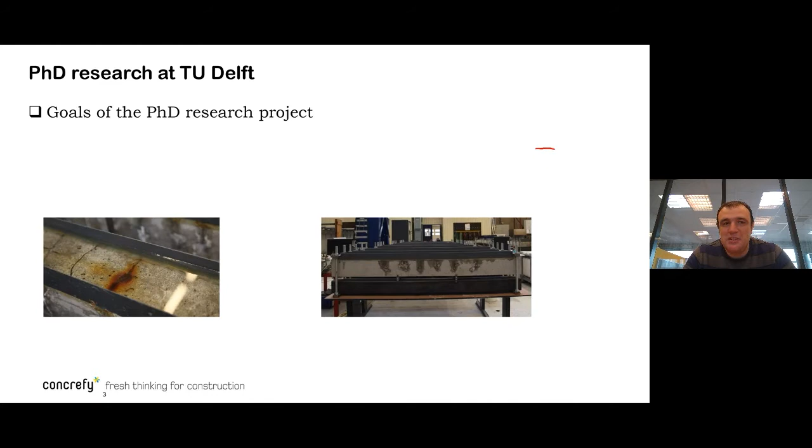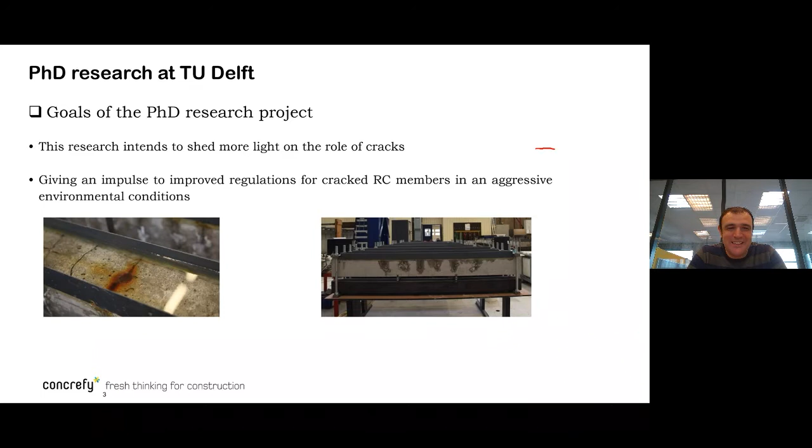The main goal of the PhD was to quantify the influence of cracks on the durability and service life of reinforced concrete structures in relation to chloride-induced corrosion. I saw the schedule, so I believe you already heard a lot in the previous 4 days about fracture mechanics, cracks, transport mechanisms in concrete, so I will not go into many details. I will just briefly show some interesting results.

After 1 year of a lot of literature study and a state-of-the-art report, the experimental setup was developed. You can see maybe in this photo, I don't know, do you see my mouse, Eric? This photo right down at the bottom. At the end, 32 reinforced concrete beams were cast, where I simulated a severe environment by putting containers on top of the beams.

And a 3.5% sodium chloride solution was used to simulate, as I said, an aggressive environment, with wetting-drying cycles: 2 days ponding cycle, 5 days drying cycle. And what were the variables in the experiments? Actually, the crack width, the crack frequency, meaning the number of cracks, also concrete cover and type of loading.

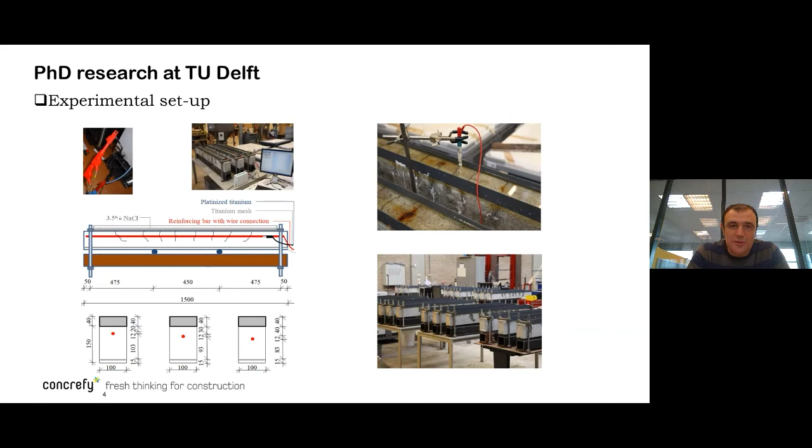The type of loading is interesting in relation to self-healing. When we have a variable load, which is quite common in reality and practice, the influence of self-healing is unfortunately a little less emphasized. But in case of sustained load and very small cracks here and there, I noticed the process of self-healing occurred and was very useful to slow down the corrosion progress.

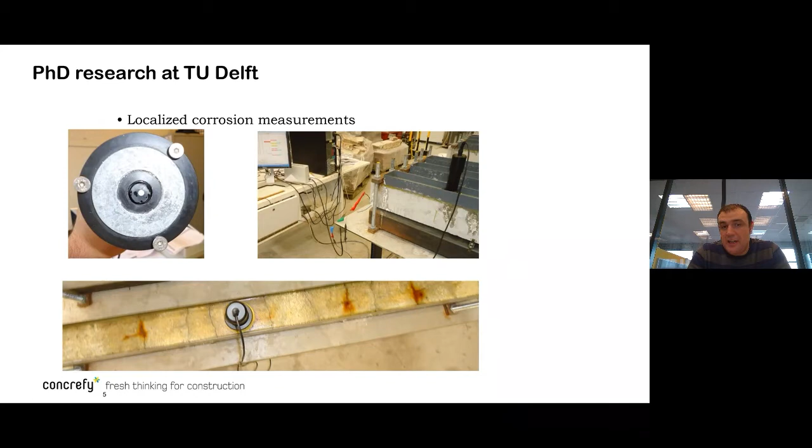What was also very interesting is that I measured localized corrosion, because we can have pitting corrosion or uniform corrosion. By measuring localized corrosion, after 2 years we had plenty of results, and it was really a headache to collect all of them.

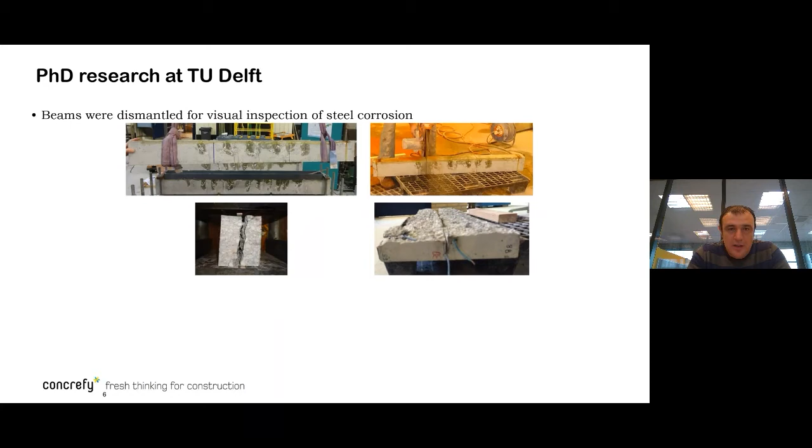And it was decided at the end that all beams, as you can see in the photos, were taken out from the setup. They were cut in thirds, into 3 pieces, each half a meter, and a splitting test was carried out, so we can see every beam from inside what happened there.

And here we can see one very interesting conclusion. At the moment, the thought in society is that there is no unique approach when discussing the influence of cracks on durability. As you know, there are codes and limits which just limit the maximum allowable surface crack width, and there's a belief among some engineers that as long as the surface crack width is less than, say, 0.2 or 0.3 millimeters, then corrosion locally is negligible and doesn't matter much. But as long as cracks are larger, there might be problems.

But what we saw in this research, and what was very interesting to show, for example here on the first photo, is the concrete cover of 20 millimeters. This was actually very porous, low-quality concrete, which was picked on purpose, because research cannot take place over a very long time - within 2 years I had to complete the tests.

So after 2 years of testing, we can see that for the unloaded beam, chloride penetration reached the level of the steel reinforcement, and we have slight corrosion. This was treated as uncracked concrete.

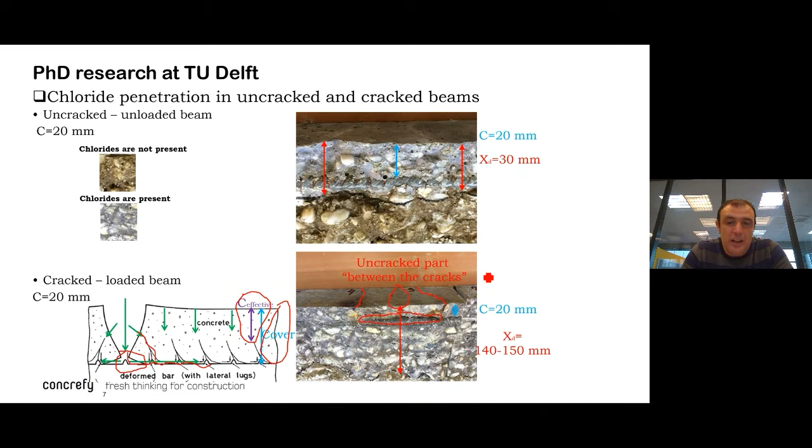So the main conclusion was that what really matters is the steel stress, which determines the development of corrosion, rather than the surface crack width as it is currently in the codes.

How to connect all the pieces at the end - as I said, we measured locally the development of corrosion, and what was very interesting is that in every reinforced concrete beam, the point of maximum corrosion rate was also the point of maximum steel stress in the beam, which confirmed our assumption at the beginning.

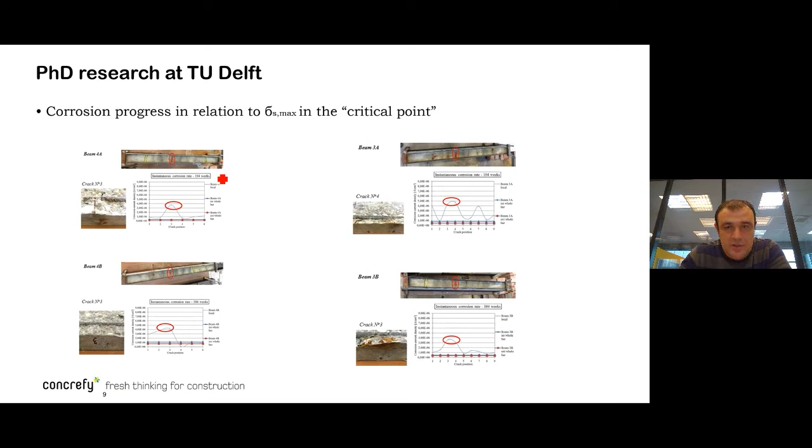It can be concluded that, as I already shown, corrosion progress is related very closely to maximum steel stress. If we have small cracks and a lower value of maximum steel stress in concrete, this damage can be acceptable. For example, here we can see an explanatory model.

First of all, we have to distinguish two kinds of corrosion. Corrosion can be uniform, but on the other hand can be localized as well. So in case of cracks, we are talking about localized corrosion. Higher steel stress, which is higher than 250 megapascal, can already shorten significantly the service life of the reinforced concrete element.

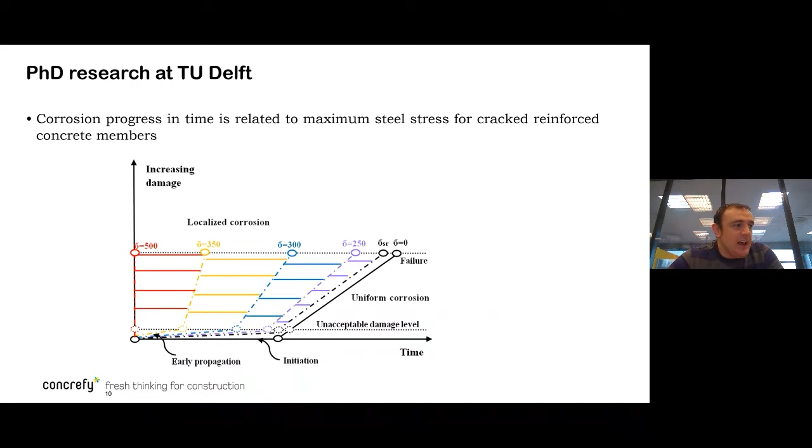On the other hand, if you have steel stress below 250, more or less we have a similar behavior as concrete that is uncracked. But of course, this is all based on a certain concrete strength, and the final conclusions of the thesis were that if we have a correct combination of maximum steel stress, appropriate concrete cover, and appropriate concrete strength under certain environmental conditions, this is the way we can design longer life concrete structures.

Also, one very important fact discovered during the research was that maximum load determines the damage in concrete in relation to corrosion. So it means once you have damage on the bridge - imagine you have a small bridge, and a big truck goes over the bridge and this truck makes some damage - after that, this damage already made there would be difficult to recover from chloride ingress, maybe with some self-healing innovative techniques in the future.

But in this work, it was proven that when we have a variable load, actually the maximum load is the governing one.

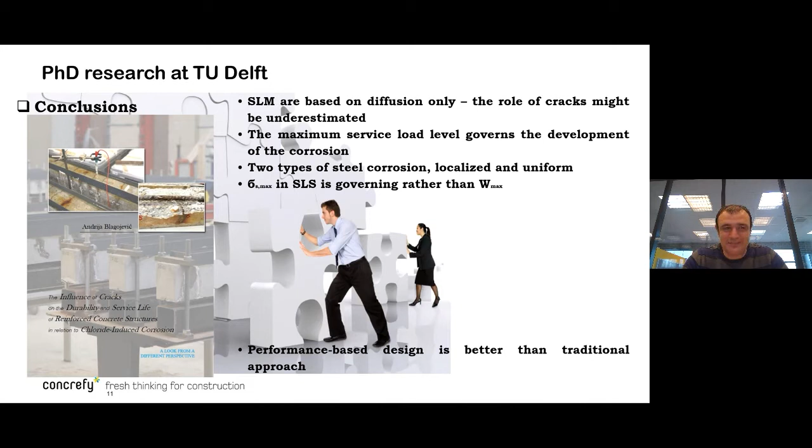If you want to see more details about all this work, you can download the book from the internet. Yeah, this is the first page.

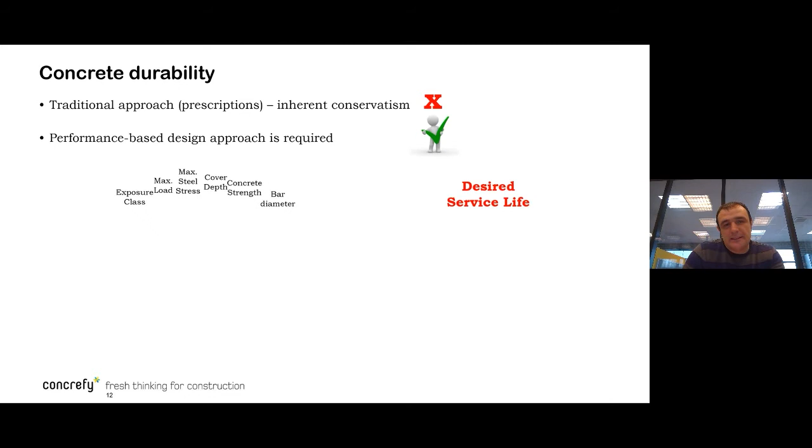So the PhD research was completed, and more or less this is what I just explained. I realized that we have to have an optimum approach for the desired service life. But somehow I realized, okay, all this stuff we did in the laboratory is valid under laboratory conditions - what would be the case in real concrete?

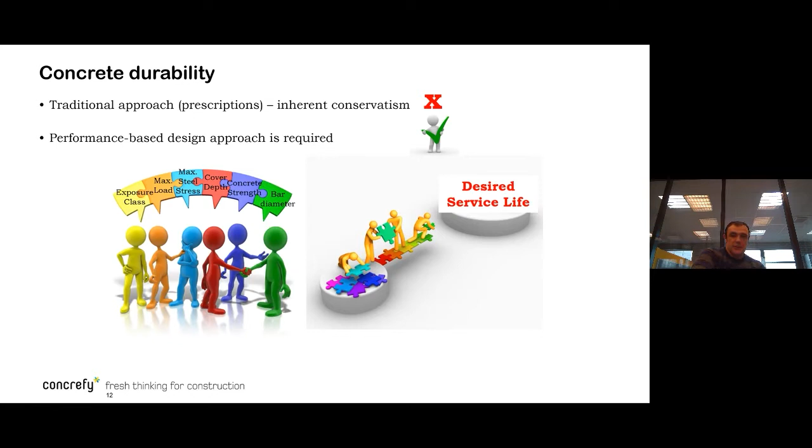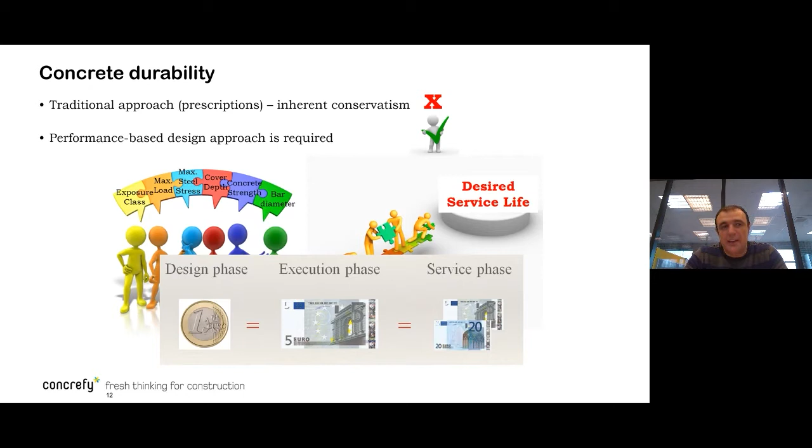And as the title of my presentation says today, from labcrete to realcrete, I started to think more about how we can in the future develop a system of concrete durability monitoring, which can be at the same time scientifically approved, but on the other hand also commercially applied and user-friendly and very understandable for engineers on the site.

On this slide we can see during the Defense Day my current boss, who just gave a presentation today - how we were discussing, and this is kind of the topics we discussed then for the future: concrete durability, material health monitoring, structural health monitoring, energy efficiency. We share the same vision.

And what was very interesting actually, how I came to Concrefy - at the same time, Tuan van Kasteren was searching for new people to build the R&D department and to focus on monitoring of service life. On the other hand, I was very teased and triggered by how I could shorten the gap between the fundamental research in terms of concrete durability and find some kind of pragmatic solutions which can facilitate the decisions of asset owners.

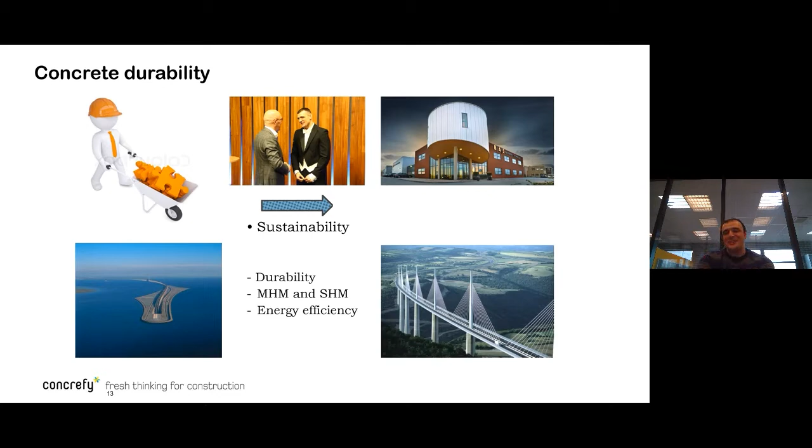So I accepted this challenge. A few days after the defense, I moved to Venlo, and I already started on Monday. And then we created one big project, asset management. But before I come to that topic...

I would like to share this slide with you. So Tuan in the morning explained how smart formwork works with a sensing system. So Doka is actually our mother company. Four years ago, in July 2016, they took over what was at that time BAS Research and Technology.

So Concrefy is now, since two years ago before the name was BAS Research and Technology - Doka took over BAS, and they had a formwork they built, and out of the blue with the Concremote, they had a smart formwork, which in other words means they can increase the productivity on the construction site. You saw the benefits this morning of what customers can gain and what kind of added value our clients can reach.

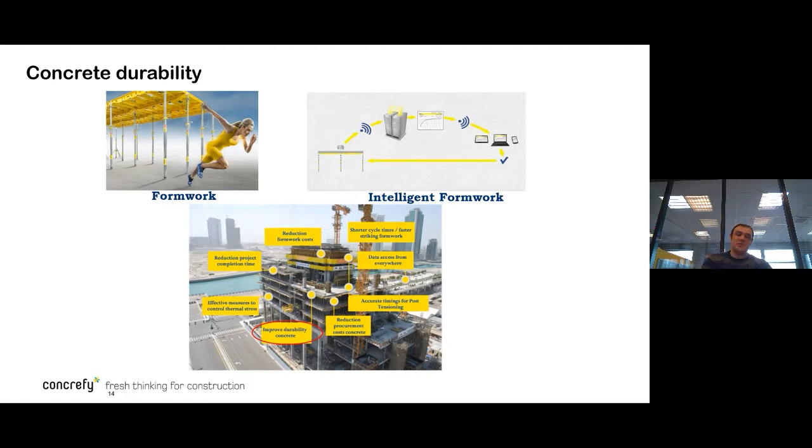But at the same time, I was thinking about concrete durability. Why should we only be involved in the construction phase of the project? Why don't we stay during the whole operational phase of the structure? This way, we can help not only the contractor during construction, but also the people responsible for maintenance, functionality and operation during the whole service time, which is sometimes 50 years, and in the future we will even design structures with a design service lifetime of 100 years.

More or less this was the kind of portfolio we established as a company: we want to create decision support tools during the design phase, construction phase, and operational phase. And the vision was from cradle to cradle.

So in the design phase, we use finite element modeling and simulations of young hardening concrete. This is how we can discover, for example, potential risks in the project.

During the construction phase, you also saw Concremote as a powerful product, but we are also busy with process control and production control in the prefab, on the site as well, checking the quality of fresh concrete digitally. We are also developing a kind of sensor for that purpose.

And asset management, yeah, asset management was a big picture. So this was the vision, but under the umbrella of asset management, what we want to do actually is provide a real-time concrete durability monitoring system which can facilitate the decision-making process of managers and experts.

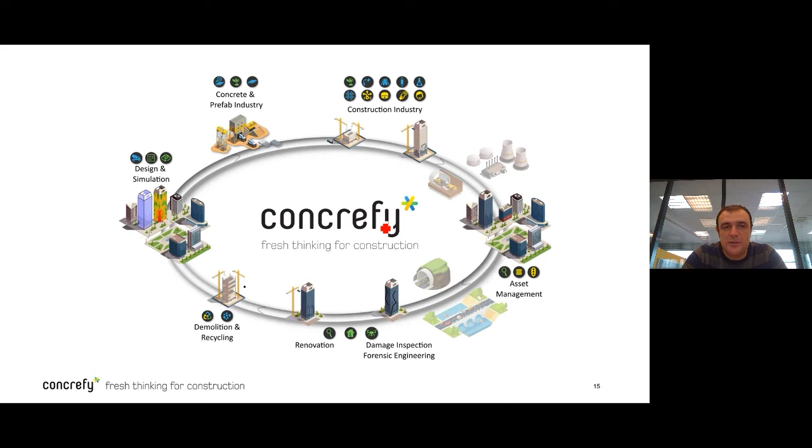So this should be a very user-friendly system with different levels of understanding. It should, on one hand, be very user-friendly in terms of traffic light, red, orange, green, but on the other hand, has to be scientifically proven and validated, so that all knowledge, guidelines, codes and standards are somehow embedded in the background within interpretation technology and smart algorithms.

You are still here, everybody? Yes. Can you hear me? Yeah, okay. Do you have some questions, remarks, or any feedback till now?

Yes, I have a question. I'd like to know more about your experiments, your thesis. Did you do some electrochemical measurements on your specimens? Not only potential, the corrosion potential, but for example electrochemical impedance?

Yes. So as far as non-destructive techniques are concerned, what was applied was half cell potential with two different kinds of electrodes: one embedded in concrete, and the other external. I also applied linear polarization resistance measurements, so I measured the corrosion rate, the average corrosion rate of the steel rebar, as well as localized corrosion rate with another electrode and some commercial device. I also did some resistivity measurements. So at the end, I have a bunch of results. If you download the thesis, you can see more details about that.

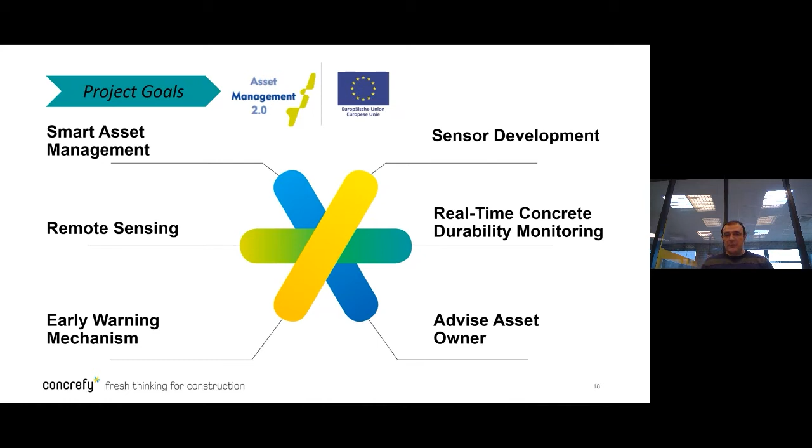Project partners have been selected based on the requirements we needed. So we needed a partner who is a specialist for wireless technology and power management, and this was a big company from Germany, Umlaut.

They also changed their name actually. Since 2 years ago, they are Umlaut—before, the name was P3 Communications. They have offices worldwide, and they are very busy in the high-tech industry, in the automotive industry. As the name says itself, P3 Communications—before, they were busy with communications and all this data management.

We had on the board IBAC University and the group of Professor Raupach. Maybe some of you know Professor Raupach.

He's a professor of the group of corrosion of materials. On the other hand, we had also representatives of authorities, let's say, the city of Mönchengladbach and Gemeente Venlo, which means in English municipality, Mönchengladbach and Venlo.

Their role in the project actually was to come up with what kind of maintenance strategy they have at the moment and how they are dealing with the concrete infrastructure. What's the plan for the future? And what kind of issues and problems they have nowadays.

We had a certain time framework, 3.5 years, and a goal that had to be achieved. What was also very interesting: at the beginning, the first 6 months, we spent on a lot of inventarization. One very important task was to analyze what endangers concrete durability.

How can we quantify in a more pragmatic way what can negatively affect the concrete durability? As you know, we can have different weathering conditions. We have environmental classes, you can find that in the codes, 206, where we distinguish the different classes. We can have, for example, concrete areas exposed to carbonation, to de-icing salts, a marine environment, but on the other hand we also have some concrete which is not exposed to these aggressive substances, and then it's more durable.

Actually, we made a kind of pyramidic approach, so we started from the top. Let's see what really affects concrete durability and how we can quantify that.

In short, we have 3 important fields. Concrete quality: when I say concrete quality, I mean if we have a dense concrete cover with good quality, there's a higher chance of better durability. If the cover depth is higher, the distance for aggressive substances to penetrate through the concrete is also longer, and it will take more time, so again it's more durable.

But we also have a lot of structural details which can affect these transport processes, like as I mentioned at the beginning of the presentation, steel stress. We can have different kinds of cracks. And at the end, we have to make an appropriate balance between all these parameters and come up with the most optimized solution. But as you know, one thing is when we do calculation and design for something, and another thing sometimes happens in reality. I mean, the spatial variability and the influence of many local effects can be very significant, and this is why we sometimes see a big scatter in reality from the things we do in a lab and what the structure is designed for.

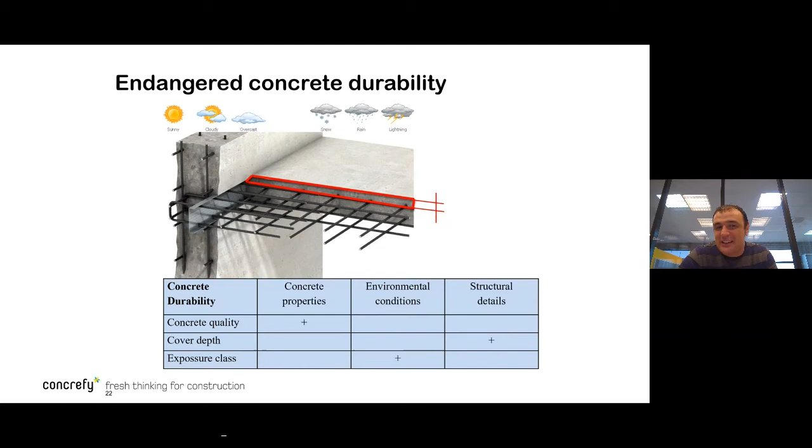So in total, here I will mention just some parameters. The list can be much longer than this. I said temperature. Why temperature? We saw today how, when we have fresh concrete, early age concrete, compressive strength gain happens. For example, if the temperature is too high during the hydration phase, as some of you already know, we can have a problem later on with delayed ettringite formation.

Moisture, very important parameter. Moisture, I always say, is kind of a friend of concrete during hydration. As you know, concrete hydrates - probably you had the lectures. We need moisture, and if we have premature evaporation of moisture, it will negatively affect the development of many properties of concrete, strength first of all, then later on also durability. But later on, when we have hardened concrete, in a way moisture is an enemy.

Why? Because if it penetrates from outside together with chlorides, or for example CO2 or any other mechanism, moisture is a parameter involved in most of them, and degradation of concrete will occur. Here we mention load because of cracks, chloride ions, gases, abrasion, aggressive liquids. We can also have sulfate attack. If we have alkali, we can have alkali-silica reaction. Some air voids in the cover can negatively affect durability. There can be some dust during the execution phase of the project, fire.

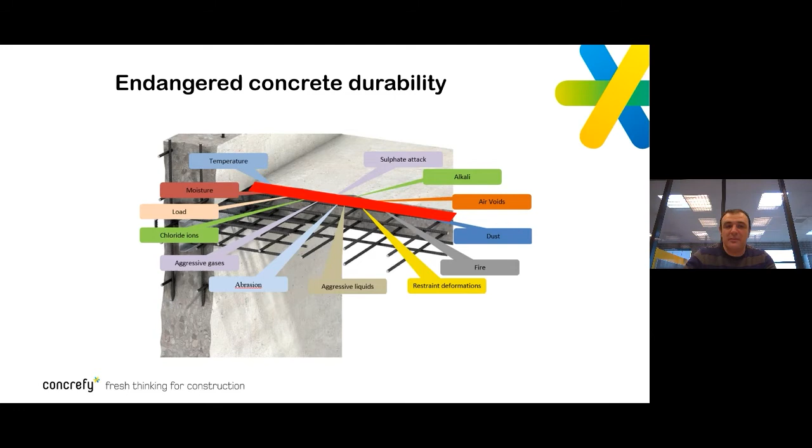So as I said, the list can be very, very long. So how to quantify this? How to develop a sensor which will measure all this kind of stuff is, pragmatically speaking, mission impossible. There are thousands of books written about all these topics.

So at the end, we decided what is the main parameter that affects durability - as one of your first answers suggested - we call it concrete cover penetrability, as a key performance indicator which will govern the durability of a concrete element. So the idea was: if we are able to measure concrete cover penetrability, but wait a second, how are we going to measure concrete cover penetrability in real structures? Which parameters do we need to measure? How? Do we need all different kinds of commercial sensors that are on the market nowadays?

There are some sensors which measure chloride, okay, but it's not a perfect sensor. It can survive a few years in concrete, and it needs to be recalibrated again and again. And there is a sensor for pH measurements, and different kinds of non-destructive measurements. And all these results are just numbers. If there is no good interpretation, it's a challenge again and can lead to misinterpretation.

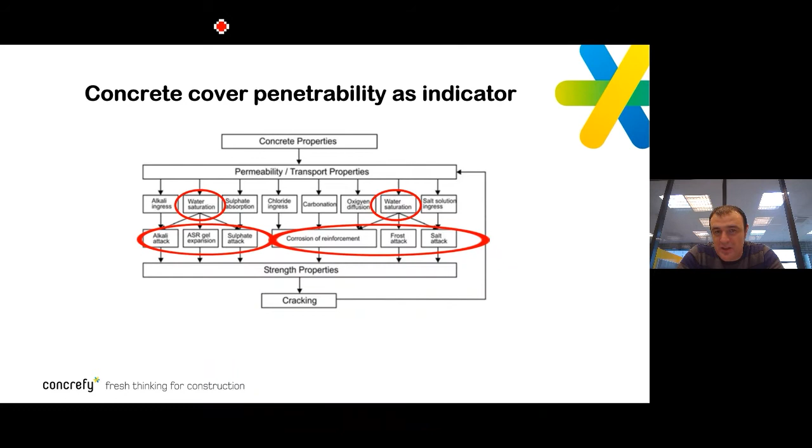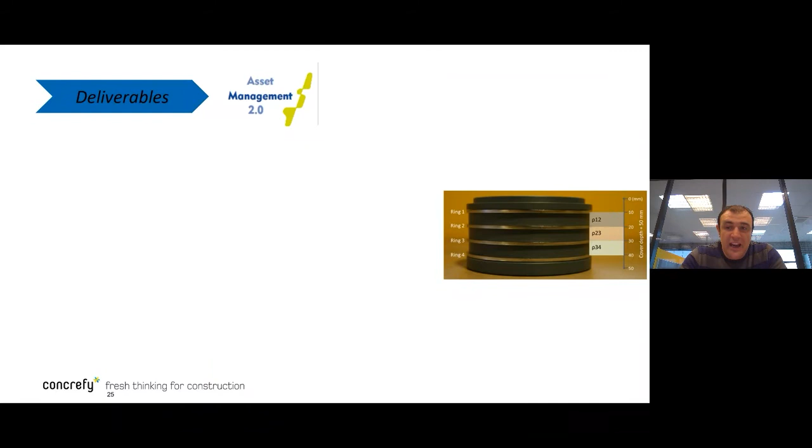Actually, what we measure first is electrical resistance. By measuring electrical resistance and doing a calibration test in the laboratory, creating isotherms, we are able to relate electrical resistance and moisture content. By doing that, we are able to measure at any point in time, every centimeter.

As you can see here, the sensor is 50 millimeters - that's the depth of the sensor - so we can create the profile. We have 3 different levels of measurements.

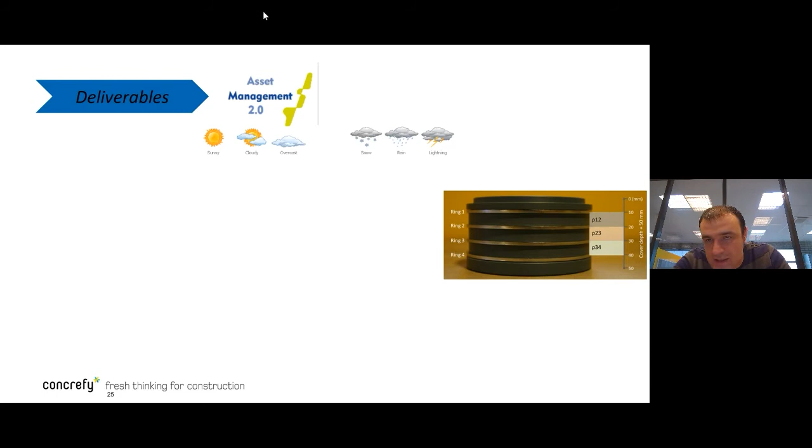Measurements are done between the rings, and this sensor - this is the concrete which I showed you in the previous slide, this is the concrete cover. So if the sensor is embedded in the concrete cover, it looks like this.

Imagine this transport diffusion process of moisture sometimes takes a lot of years. We are able to measure what really happens in a real structure. So it's not an assumption anymore.

It's not something based only on measurements in the lab, but we have a sensor in a real structure which gives us real-time information, which is very valuable for further prediction and predictive analytics. Let's say we can know if we are in a green zone now, that everything is okay.

Or the problem is going to come within a few years, or imagine something unpredictable happens for any reason. The sensor will be able to capture this moment, like today, and send a signal via web portal and internet to the client.

It will send a notification: this structure, at this element, red zone - something is happening now. So you have to react upon that, and this is a proactive approach.

As you know, most people who inspect concrete infrastructure see, let's say, the outside part of the concrete, the skin of the concrete. So most of the time we have to wait for the problem that happened inside of the concrete. As you know, for example, corrosion will start inside of the concrete and it will not be visible for many years.

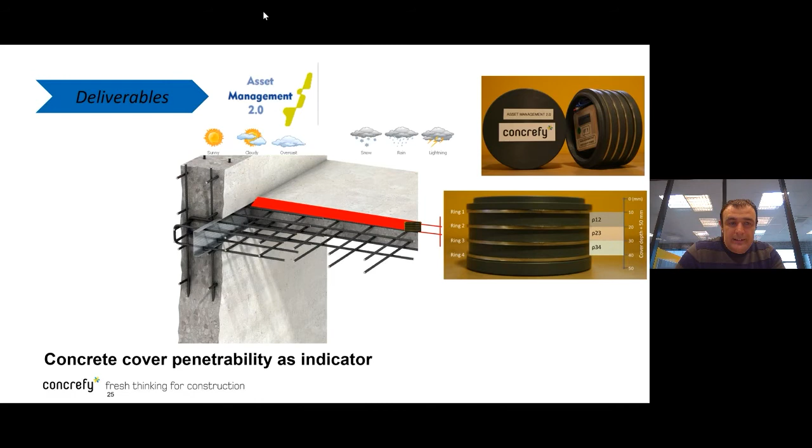Before I start to explain how we started tests and what we did in the lab, and how we correlate lab criteria to real criteria, is there any question? Is everything clear so far?

Salam asked, were your specimens under sustained loads? If so, could you please explain how did you manage to keep constant loading, taking into account the creep and relaxation loss of the load?

So probably this question is really in relation to the PhD research. It was asked half an hour ago, so maybe related to the last part of the presentation.

Okay, yeah, that's one, I will answer. If you see the book again, actually it was not a sustained load, but a load was applied to create a certain crack width at the surface, and once it was achieved, it was not changed anymore. So there was an effect of relaxation and creep, and in time the load became actually a little bit lower. You can find this calculation and analysis in the thesis, and this is why some cracks became a little bit lower in time. Is the answer clear?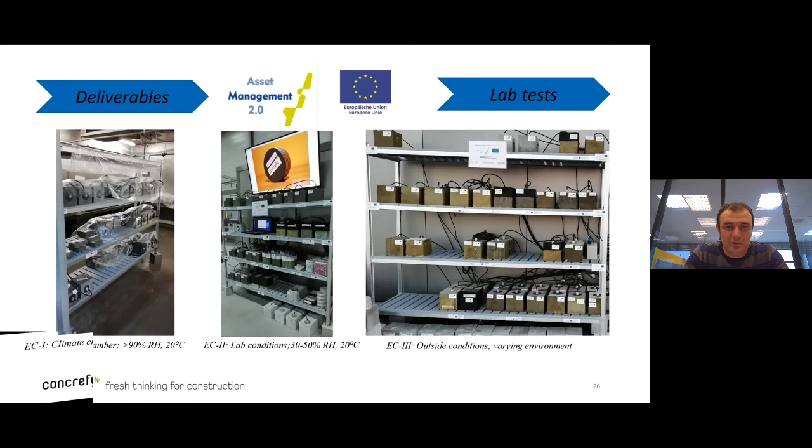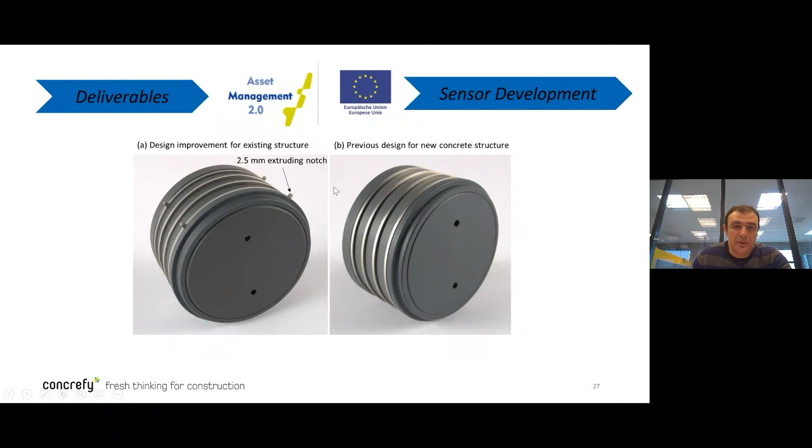Some big walls - at the end of the project we developed these two sensors, let's say. One is for the new concrete, and this solution is valid for both structures, for the new structures as well as existing structures. We will see later on how the procedure of installation works in existing structures. For the existing structure we have a small notch here and there, which is 2.5 millimeter, and this is the sensor for the new structure.

This is the cross section of the sensor, so you can see how it looks like. And why the sensor is so big is, of course, that we need a lot of electronics inside, which will make it possible that the sensor is wireless.

There was actually a big challenge. The idea was that once we embed a sensor in the concrete, it has to survive at least 50 years without human intervention at all. Because our vision for the future is that once we install these sensors, we can control the whole infrastructure worldwide - not that every now and then somebody goes and changes some batteries, again and again.

So the wireless system and power management were developed in a way that the battery in the sensor can survive for many, many years. Don't ask me how it was possible, but at the end it was possible. It was the biggest challenge at the beginning.

And we actually use LoRa technology system. It means if we have one big project with sensors, let's say 20, 30, 40 sensors, there is one big gateway which collects the whole data from the sensors, sends them to the cloud, and then we download the data directly from the cloud, and all this data goes via smart algorithms and interpretation methodology.

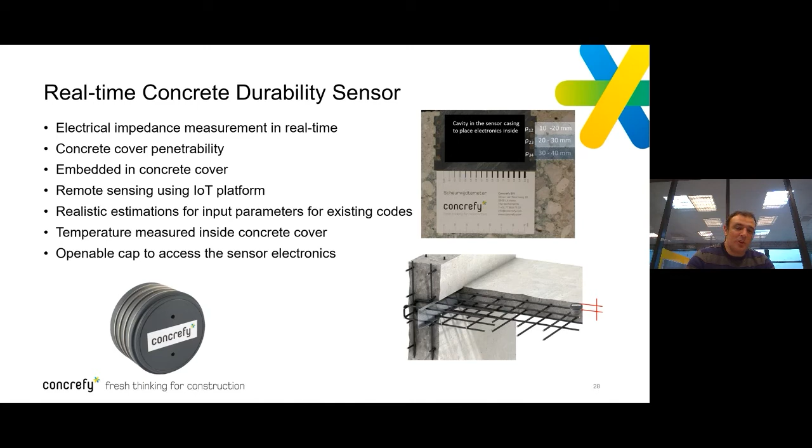By measuring these two parameters, we saw at the end how we came up with very important and emphasized added value for the customers. We saw examples of how a customer can save a huge amount of budget in projects by shortening the cycle times and the completion time of the project, by knowing which kind of mixture is needed under which circumstances. And as Tuan said, the vision for the future is that we develop the system so we can have control of the concrete infrastructure's whole service life, until the phase when we need to demolish the structure and reuse the concrete again.

What I just said, we can actually see in this slide. For example, this is the Zeelandbrug in the Netherlands, one of the biggest bridges. You can read on the internet, they have many issues, challenges, and problems nowadays. So you can imagine you have to close the bridge, stop the traffic, inspect it, you need a lot of equipment and a lot of people. In other words, it's time consuming and takes manpower and inspections.

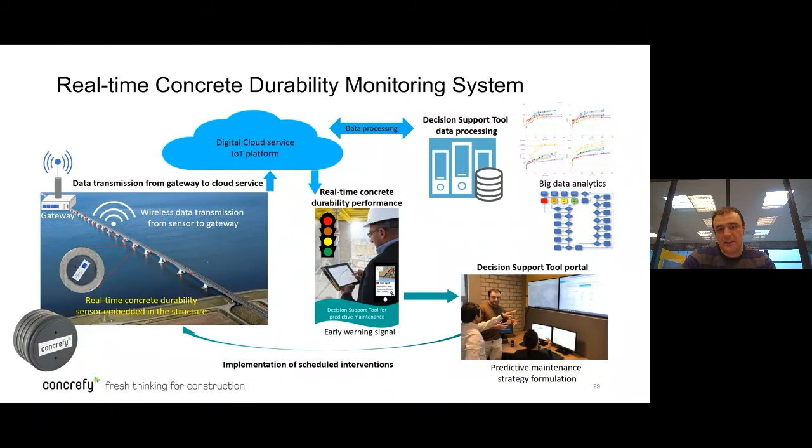Our vision, especially for these large-scale projects, is to have a real-time concrete durability monitoring system, where sensors can inform us and send a notification: hey, there is a problem in this bridge at this column. So we know exactly the moment when we need to react. Then, if the customer is from Australia, he can call a local consultancy agency to do an extra check at that position in the structure, even though there is no significant damage visible at the surface of the concrete. The damage is just about to start around the reinforcement, let's say - chlorides are just about to reach the critical chloride content at the level of the reinforcement.

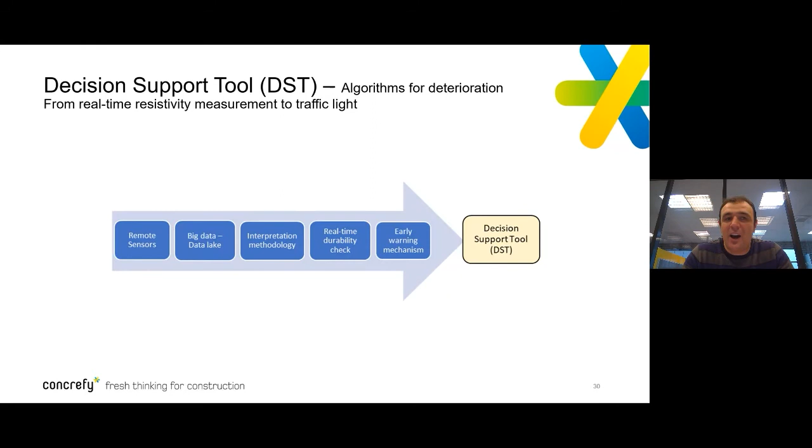So one of the strategic goals of the company is visualization. Everything we do, we try to visualize for the clients. If I show you a lot of text, in a few days from now you'll forget 90% of what I presented. But this event is recorded, so you can always come back to it. In general, if we present things in a visualized way, it's always more user-friendly, and it's easier for communication with people in the concrete field. It's much more clear, let's say. Managers sometimes aren't so interested in the details of carbonation, chloride-induced corrosion, or other degradation mechanisms. They just want to know what they need to do, when, and how much they need to invest for that.

So what we do, the sensor measures the data, we measure the resistance, and by having a calibration test, we know what's the moisture content, we know the profile, and we know the progress of moisture ingress within the concrete cover. By knowing this and applying different guidelines and codes, we're able to create an assessment of all these different degradation mechanisms.

What we developed is a chloride ingress model. We use existing models in a way, but with the sensor we provide more realistic input for these models, because they contain too much empirical parameters which affect the final result. If you have a sensor and real-time data from a real project, your results will be more accurate because the inputs are more reliable. It's that simple.

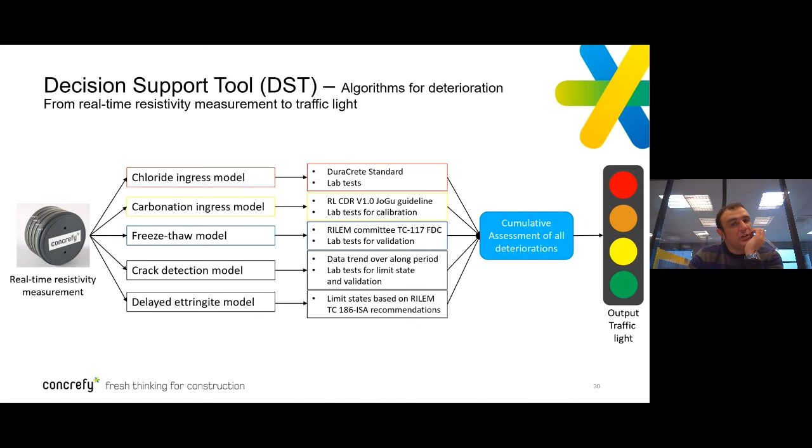So here we can see we have a module for delayed ettringite formation for cracks. If there's any crack around, the sensor will recognize it also. Freeze-thaw model and carbonation as well.

And before we even reach stage one, we know it's going to come in a few years, a few weeks, or 20 years from now. This is important for managers to create budget optimization and predictive maintenance strategies. They want to know when they need to invest money and when they can save money - is it better to do small preventive interventions per year, or one big intervention in five years? It always depends on the budget of the clients and their goals.

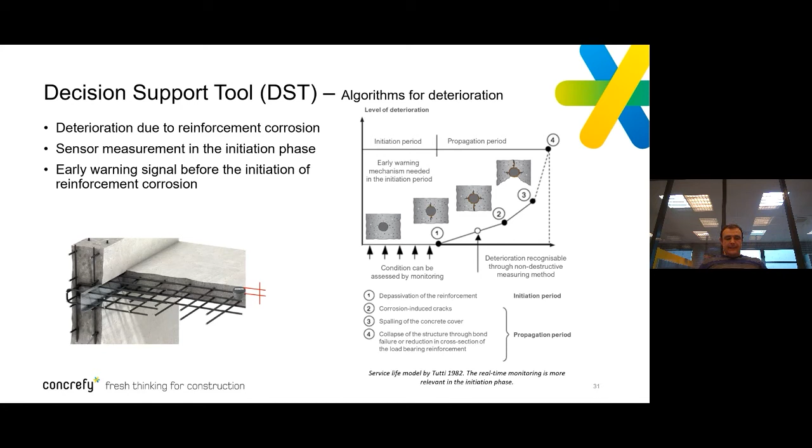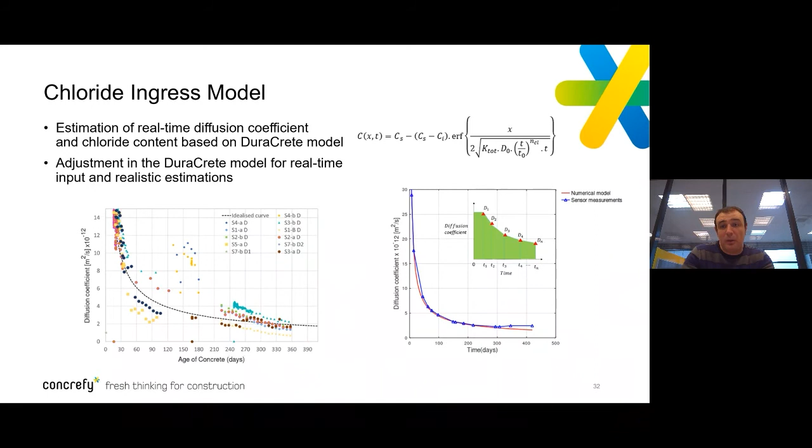Probability of corrosion - in the portal we're able to assess what the probability of corrosion is, whether it's 5%, 10%, or 50%. The limit state adopted here is by Professor Angst at a Swiss university. He created in one publication, which you can read about, a log-normal distribution where critical chloride content is modeled as a stochastic variable.

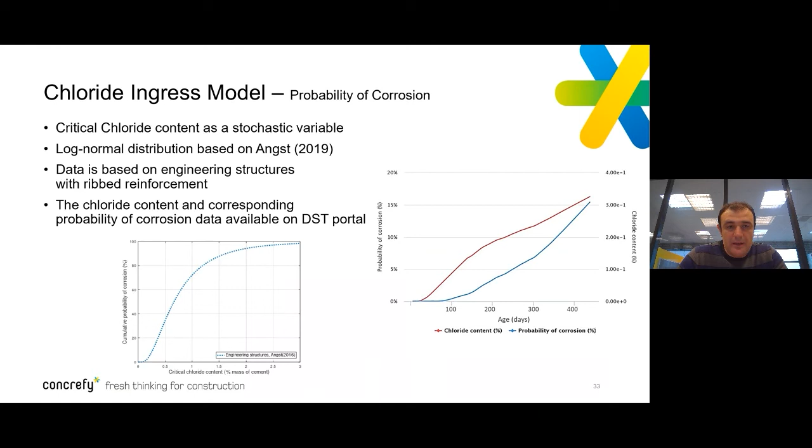So how do we come up with a very simplified solution for the customer, for example, someone who doesn't have any knowledge about concrete durability or concrete at all? They would like to have a kind of traffic light system, so we're here to provide this traffic light system and user-friendly solutions for them.

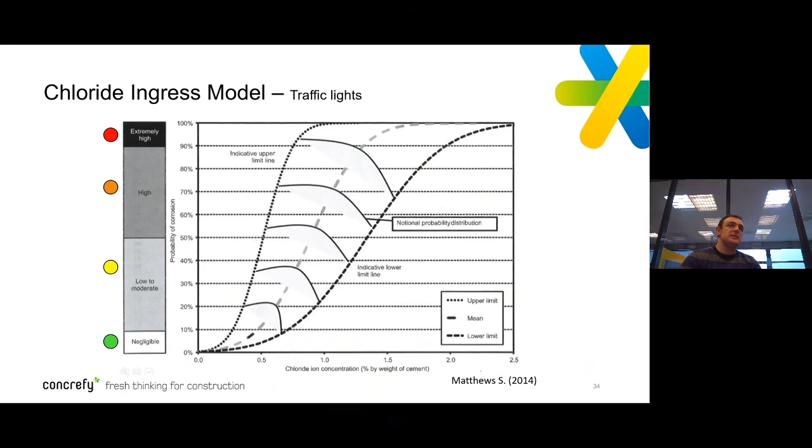One more example of a carbonation model. Based on the calibration and accelerated carbonation tests in the laboratory for a specific mix design, and the measurements in real time, what does real time mean? We measure relative humidity. If relative humidity is between certain levels, we can expect carbonation progress. But if relative humidity is too low or too high, there is not much progress of CO2 in the concrete cover.

This was just one example which will mean that in less than 5 years, carbonation induced corrosion will start, and you can react upon that. You can apply preventive measures. This is very important for asset owners because they can save a lot of money. It's better to invest a small budget into small interventions before severe damage and problems come in a few years. Then it will cost much more.

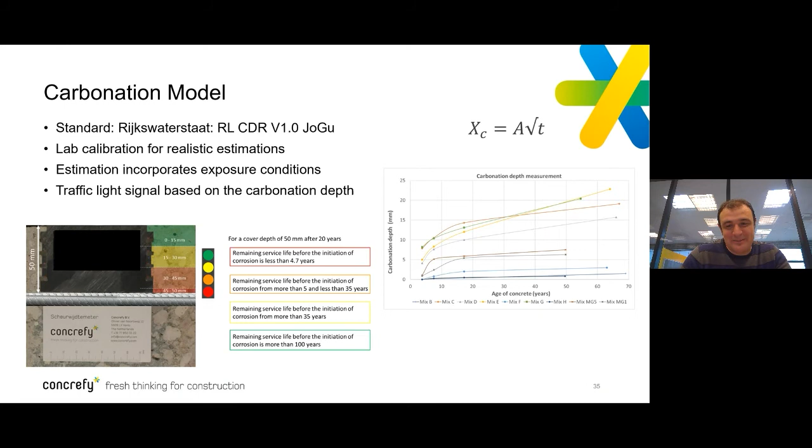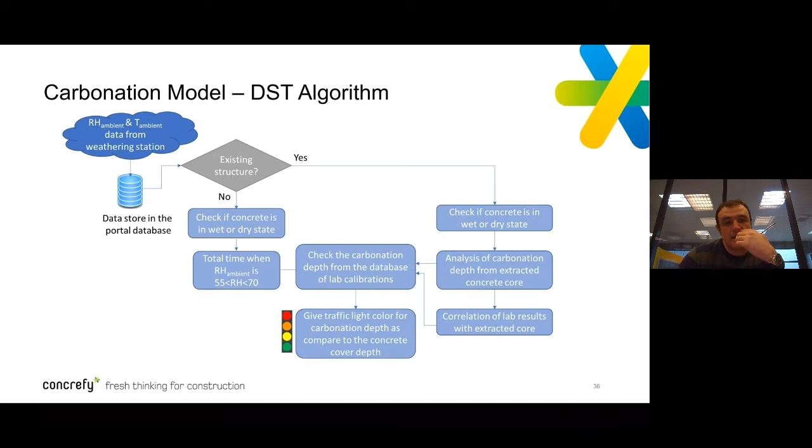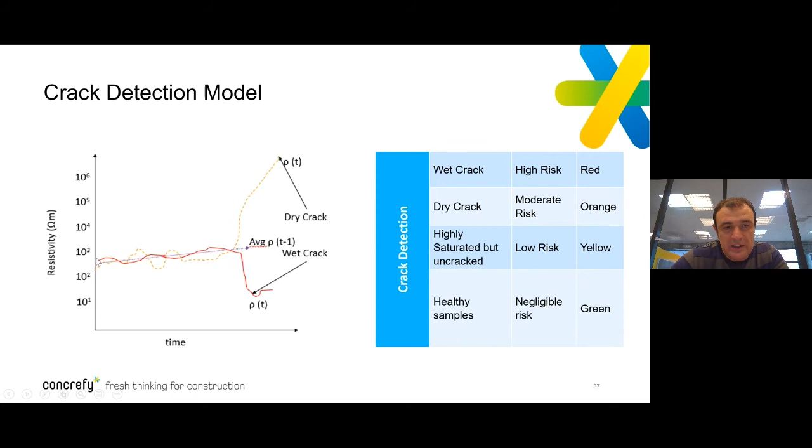So this was the healthy sample, and then when the crack appeared, what happened? The resistivity out of the blue jumped very high - it means it's a dry crack. But once moisture reaches the same crack, the value will go completely down when it's wet. So this was the healthy sample, this was the dry crack, this was the wet crack.

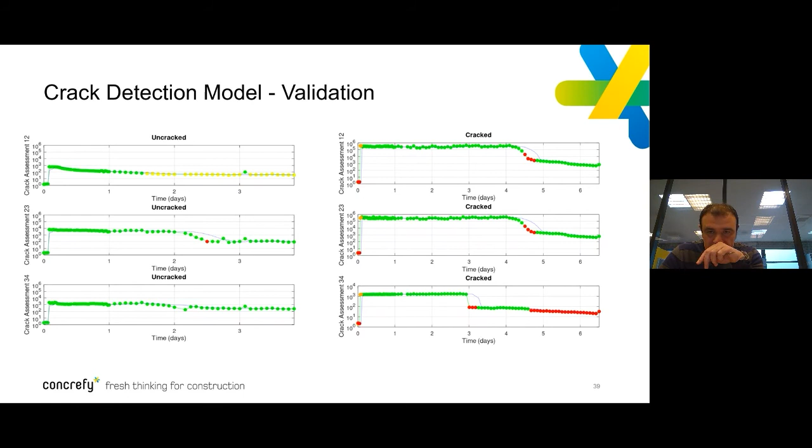Some example of a freeze-thaw model. As you know, the temperature has to be lower than 0 - that's one condition - and the other condition for freeze-thaw attack is degree of saturation. If degree of saturation is above a certain limit, there is a threat in relation to damage, and if it's lower, then it's not a big threat.

Then, of course, there is the influence of many parameters, for example type of binder. Here on the graph, we can see what happened - we did some tests in the lab also with CEM1 and with CEM3B, and all other parameters are actually the same in these two mixes. We see that the resistivity when this transition happened, when water became ice, resistance is higher in the case of blast furnace cement like CEM3B than in the case of CEM1.

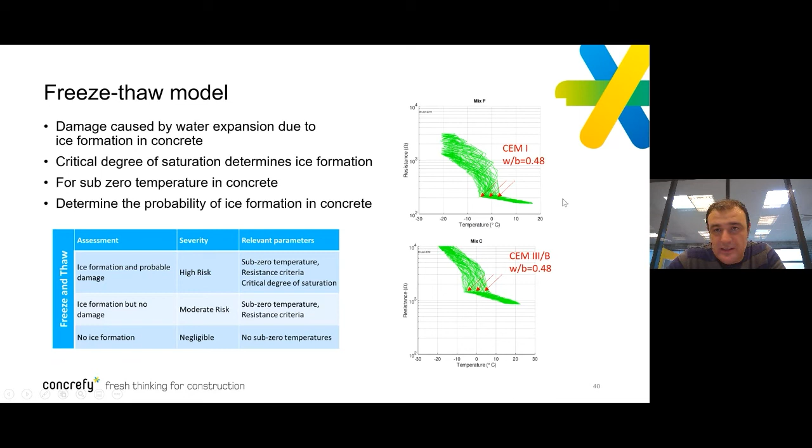This is an example of the delayed ettringite formation model. If the temperature in fresh concrete is above 70 degrees for any reason during hydration, there will be a red light alerting the client. We will not wait until it reaches 70 - even if it's 60, there will be a message and notification to the client: your concrete temperature is 60, if it reaches 70 it's already a big problem.

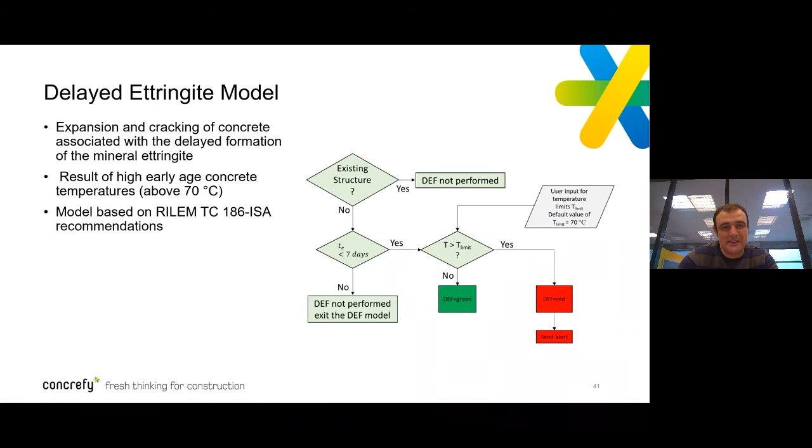We call this digital consultancy - this is also one of the strategic goals of the company. We try to warn clients and help them with our 24/7 support from the Concrete Competence Centrum here in Venlo, sending them digital advice on what needs to be done before they face a bigger problem. This is one example with delayed ettringite formation.

Installation in existing structures.

So in the new structure, this is the right sensor setup. In the existing structure, we need a coupling mortar. The coupling effect of the mortar with concrete is very important. So how does it work in an existing structure?

For the inspection procedure, we drill the core, we analyze the core, and with a special mortar designed for this purpose, via this mortar, we measure what happens in existing concrete.

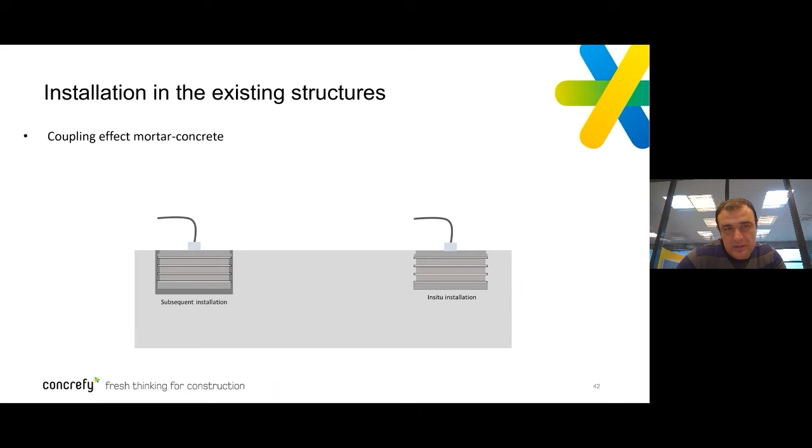Some correlation factors have been developed and many tests have been done here in the company. We will see some photos later on with analysis. This shows some of the tests on how the existing concrete and moisture ingress in existing concrete is measured by sensor via the mortar, and some correlation factors have been developed.

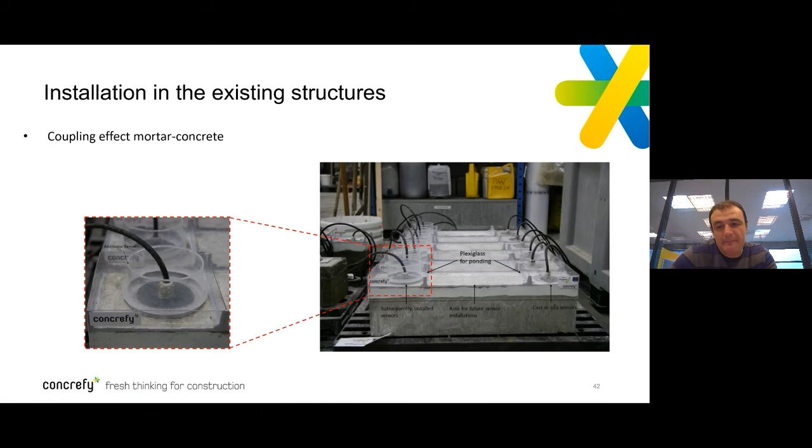These beams were cast about 3 years ago. One sensor is installed, as you see in the photo, which we call a cast-in-situ sensor in new concrete. The other sensor was installed after a couple of months. In the middle of the beam, we plan in a few years to install another sensor, and then another, just to see the aging effect of concrete on the results.

Before I go to one pilot project where we installed the sensor in the bridge, there might be some questions, remarks, or any feedback.

What is the criteria to decide how many sensors we need and where to implement the sensors in certain elements? For big structures like a bridge, where do you locate your sensors, for example in certain columns? What is the criteria to decide how many sensors we need, or what is the optimum placement to implement the sensors?

Thank you. Very nice question.

We have a lot of experience here in the company regarding forensic engineering, inspections, and damage, so we have a grip on what happens in existing infrastructures nowadays. Based on how big the structure is, we always have to work together with the client to come up with an optimal solution. He cannot install thousands of these sensors because it will cost a lot of money. Our idea for the future and for business development is to use as few sensors as possible while still getting good insight and a good feeling about what happened in the structure.

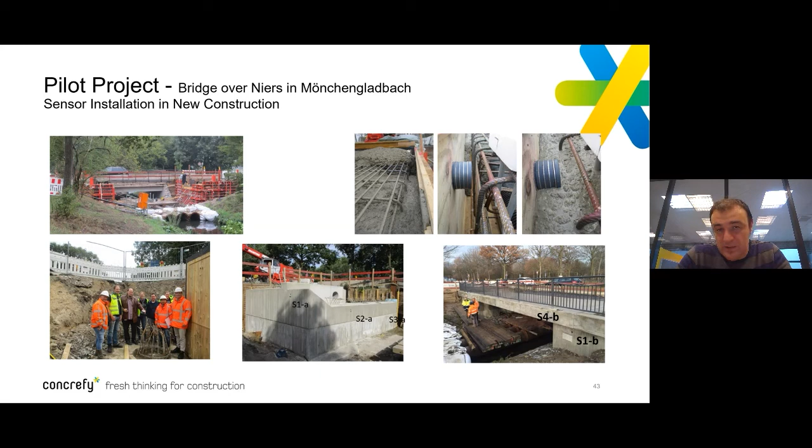How does it work? As Tuan also said, the purpose of this sensor is to stay in the concrete more than 50 years and to keep this bridge under control for more than 50 years.

Let's see how it looks visualized. This is exactly that bridge. We installed 16 of these sensors, and measurements are still running. We receive the data on a daily basis.

Once you are in Concrefy, I will show you on the portal how it looks. For this purpose, I downloaded a couple of photos in this presentation, which you will see later on.

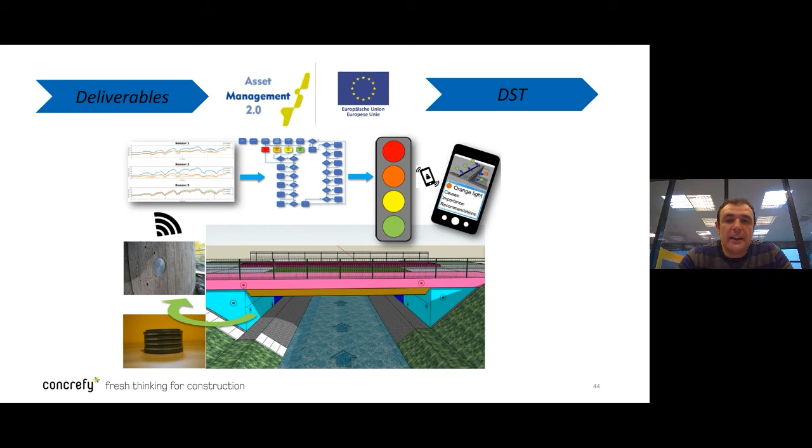But in general, what happens? We have a bridge, we have a sensor. The sensor is embedded in the concrete cover. The sensor measures the data and sends it to the cloud. In the cloud, there are a lot of algorithms based on guidelines and standards, and for all of these degradation models, limit states have been defined. As an output, we have a traffic light and also recommendations for what needs to be done.

This is one of the examples for the pilot project. This is the wall built in Venlo 8 years ago as part of another Interreg project. So for existing structures, the strategy you can see here.

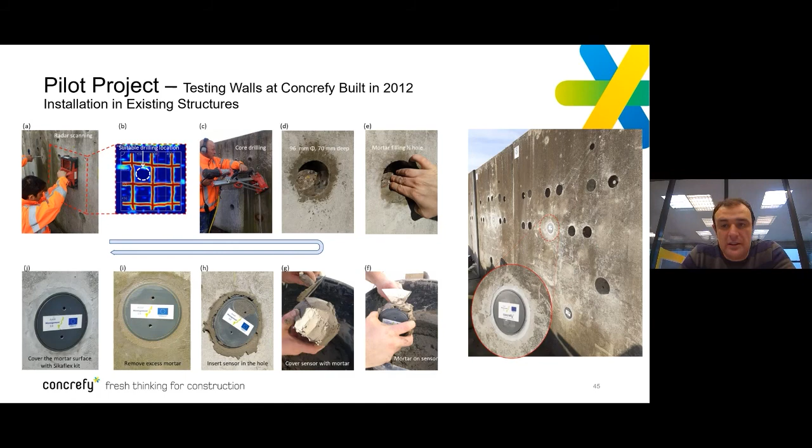We use a radar, we do a scanning, we drill a core, we bring the core to the lab and analyze it, then we put a sensor in with this mortar, and at the top we have some Sikaflex kit. Within 3 months we have a moisture balance between the mortar and existing concrete, and after 3 months, all the data we measure with the sensor represent the performance of the existing concrete.

This is from our web portal, decision support tool. We can see different kinds of projects, and the idea of this asset management project is that anytime you can click on any project on the map and see a kind of birth certificate of the concrete infrastructure. Anytime you want to know anything about any project, with a few clicks you can see the binder type, the water cement ratio, when it was cast, the history, and what interventions have been done meanwhile.

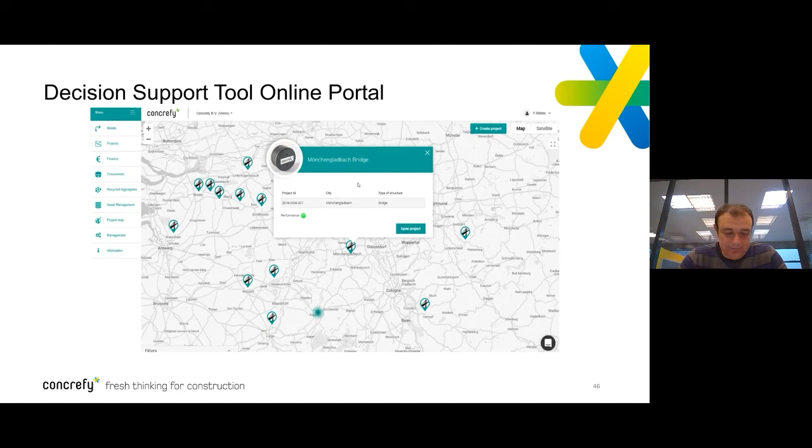Yeah, this is what I just said. You can see all these details and performance. This is the performance per sensor, for example from the pilot project in Mönchengladbach.

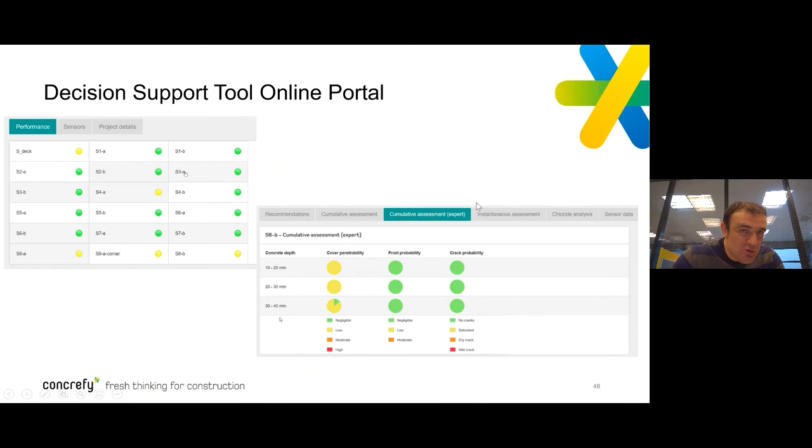So if you are a manager, you are only interested in these lights. If there's a durability expert in the company, he will dig deeper into it, like why you picked this limit state, what it means. Somebody might want to see the raw data. So we have explanations for different levels - for managers, budget holders, and durability experts.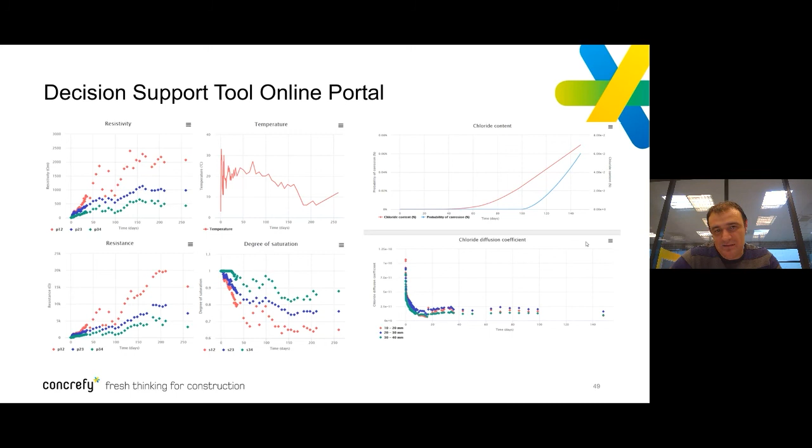This is the raw data, for example resistance, resistivity, degree of saturation. What is the real-time chloride diffusion coefficient? All in all, at the end, it can be concluded.

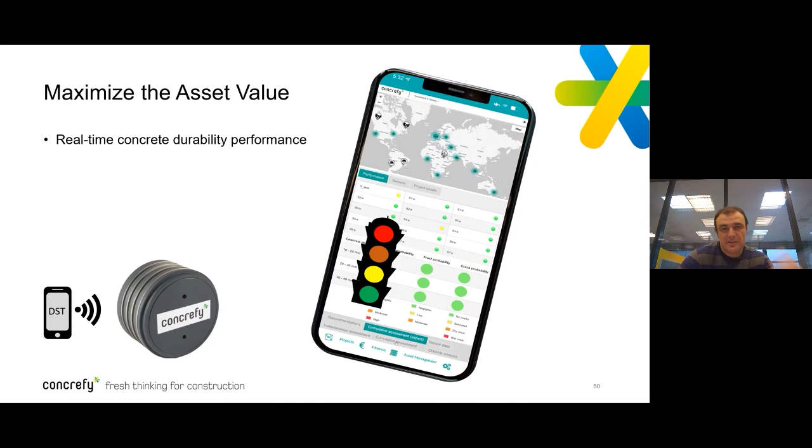So the final goal is to maximize the asset value. How can we do this? By providing this real-time concrete durability performance. It's a platform, not just a sensor - it's a whole system. I call it a value engineering method. We have to find the appropriate balance between performance, risks, costs, availability of infrastructure, maintainability, and reliability.

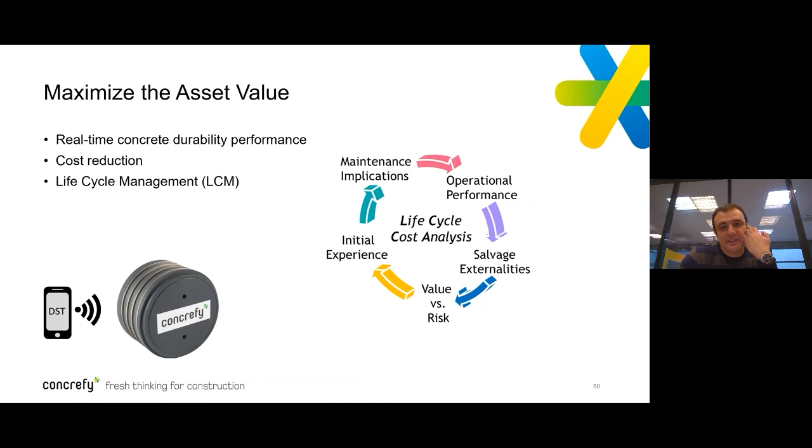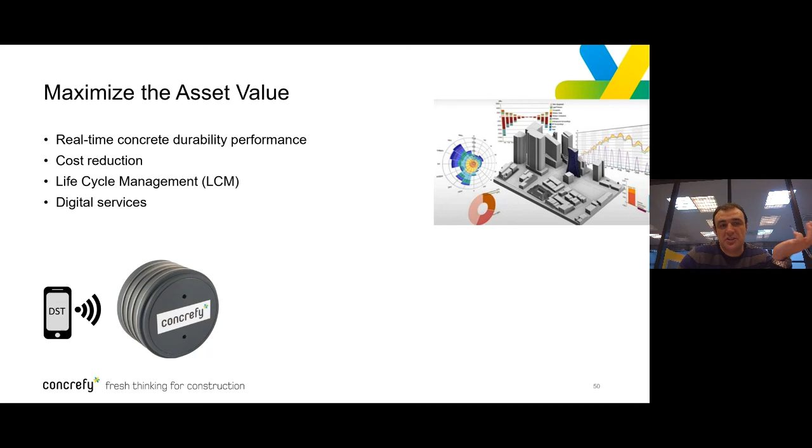We want to help the asset owner make decisions about when to spend the money and when to save money. He can do this only by carrying out life cycle cost management at every moment - that's what we can actually do for him. He will have a digital portfolio of solutions, and based on his wishes, he can decide what is best for him. By doing this, as I already said, we increase the safety, reliability, and availability of our concrete infrastructure.

This is big data analytics for concrete durability performance. The idea is also that we create in the future a digital twin data information management system, so every maintenance and forensic engineering done in the construction industry can be digitized and downloaded any time via web portal, just within a few seconds. We call this a digital dashboard.

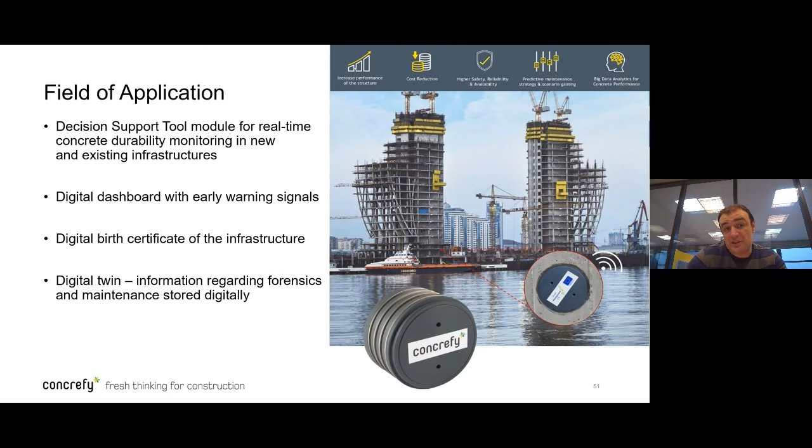I have one question for all of you, if you are still here: the next step for the future is how can we measure and quantify the effectiveness of self-healing in concrete remotely? This is a question you can think about, and we can discuss in the future.

Yes, more or less that's all for today. It took me a little bit more time than I planned.

Thank you, Andrija. I think that was a very nice overview of your PhD and also what you do now. It's very good to see how you can make a future also after a PhD.

Yes, this is why I took a little bit more time to explain that I was in the same shoes as other researchers 9-10 years ago. Then I stayed in the same field and the same topic, but now I just do more things related to the real practice. The best combination is to be at both sides, to shorten the gap and make a bridge between fundamental research and commercial things. So then you are in the field of applied research, and I really enjoyed it.

Concrefy is also multicultural. We had students from TU Eindhoven, TU Twente, TU Delft, who are internationals as well. Some of them go back and forth to TU Delft, who used to work on this project. They gave a great contribution to the project. It's a nice, international environment, and once you have time, all the students who are part of these SMARTINCS, we are glad to host you, give you a lab tour, and show you some other stuff.